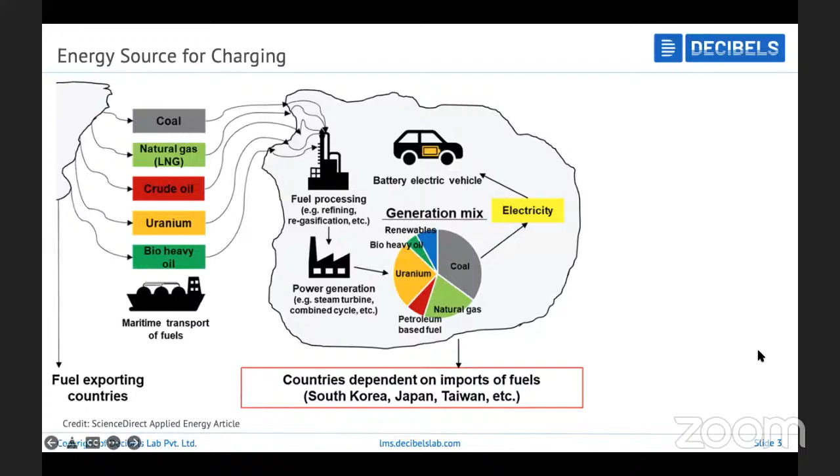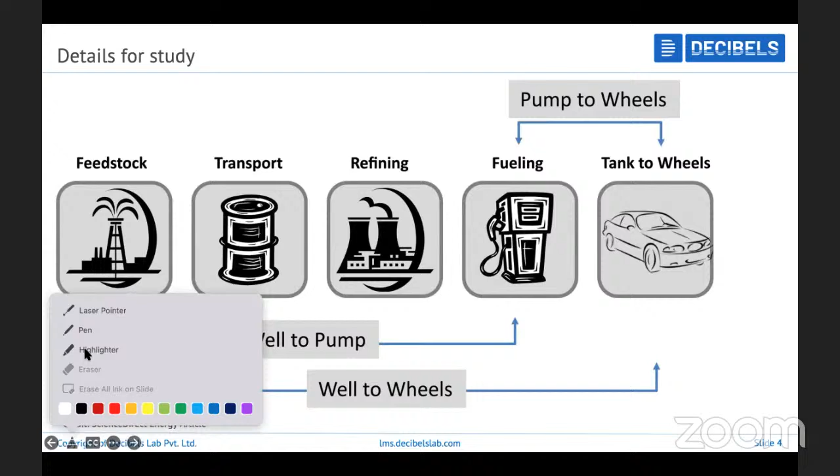The important thing we need to understand here is a topic called well-to-wheel. If you take this topic for discussion, there is well-to-pump, well-to-wheel, and pump-to-wheel. These are the three typical analyses that give you an idea of what kind of analysis should be done to justify that EVs are eco-friendly.

If you do the analysis between a fuel tank, or consider this to be a charging station, and an electric vehicle, then EVs are awesome. EVs are the most eco-friendly elements in the world.

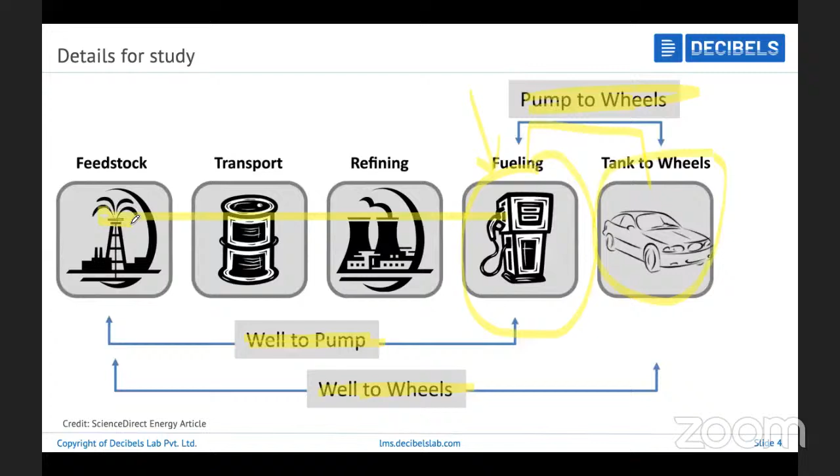But the problem also lies in this: it's not that you just don't make emissions in the city or at the tailpipe while driving, but you also make emissions across the whole bandwidth, from the production of electricity or extraction of materials. If it's diesel and gasoline, it comes from crude oil. If it's electricity, it comes from thermal power stations using coal, natural gases, or various other sources like nuclear. So you're making emissions across the whole line.

You're basically supposed to identify the source used to get the energy started. There is also data available that shows, if you actually drive a mid-sized car, something like a Swift, over about 12,000 miles or about 20,000 kilometers, you will produce this much carbon, CO2, this much NOx, this much PM.

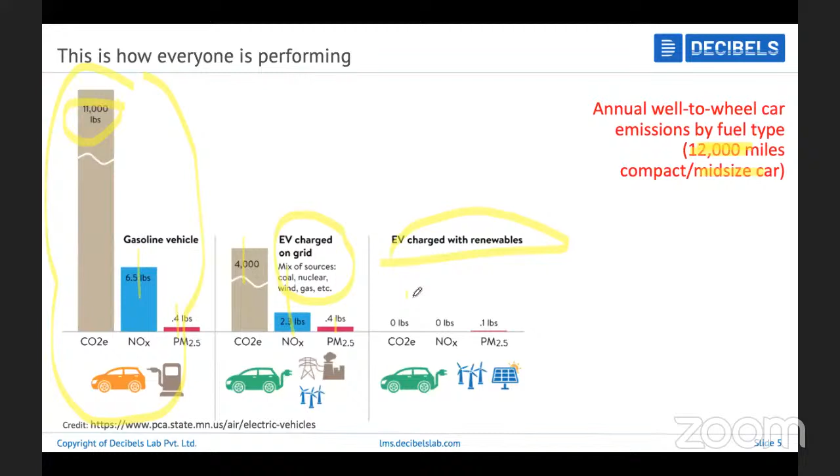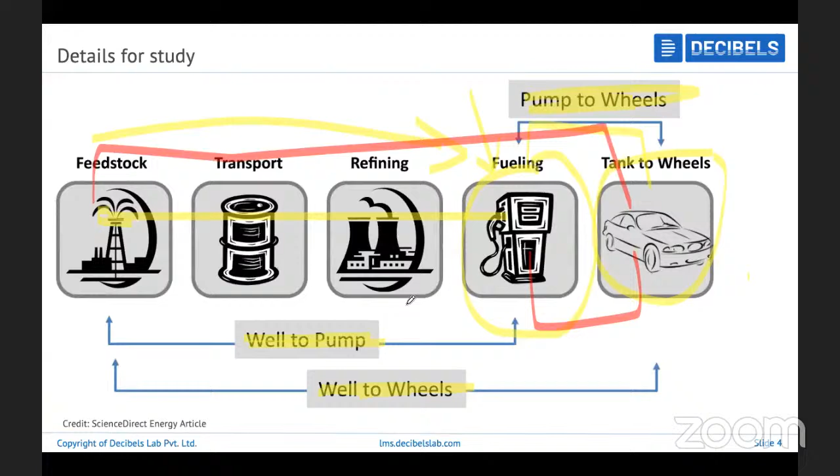But if you charge the EV by grid, you are expected to produce this much emissions. But if you do it with renewables, it says you don't make any emissions. Okay, this is not true. If I go back, this analysis is done between this point to here, not from here to here—it is between this to this. So with that way, it proves that EV is eco-friendly.

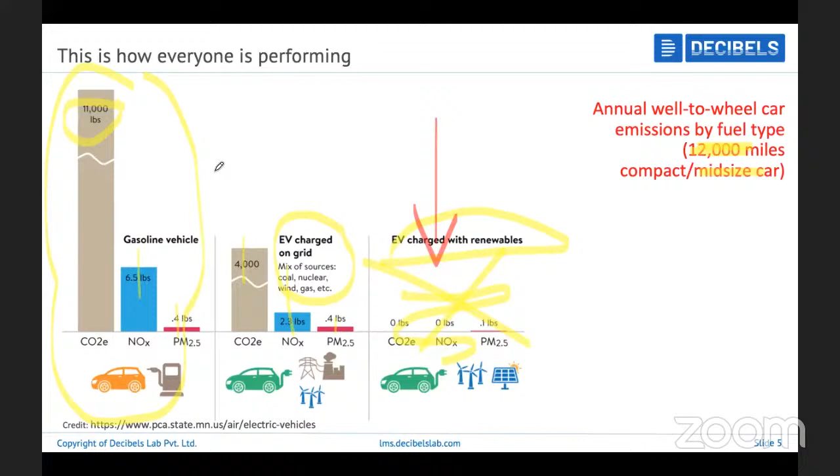So now we have to somehow prove this, that it is more eco-friendly with respect to our calculations. There's another slide where I wanted to highlight why we are focusing on the transportation segment.

Why are we focusing on the transportation segment to electrify? We can electrify industries, we can electrify different things. Already our houses are electrified because of all the electricity we use for applications. But in transportation, if you see the amount of energy produced and consumed, the transportation sector consumes the highest amount of energy. Because of that, if we electrify that sector, we will be able to reduce a lot of emissions. So that's the goal—why the world is focusing towards electrification of the automotive sector.

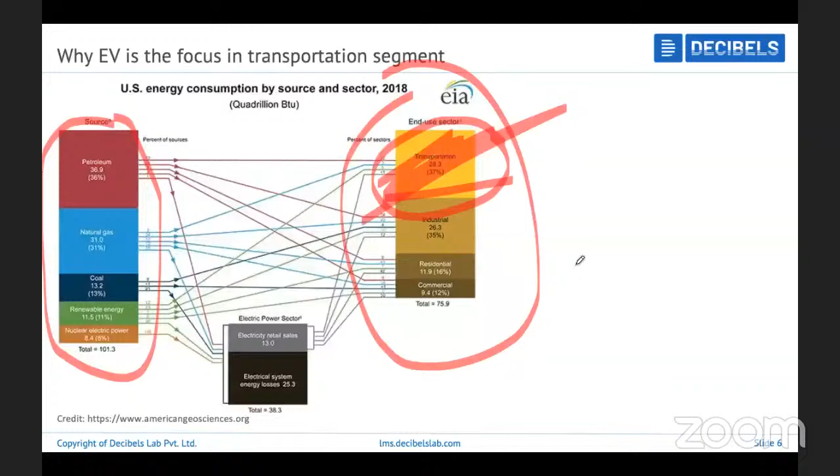I believe everybody can see my screen. So let's start one by one. If you can also do hand calculations along with me, that's good too. The first important thing from this side is...

Right, Bajan, yeah. Screen is not shared. Oh, is it? Okay.

So if you see here, let's take something like a Honda Activa and compare it to an Ather. They're almost like the same benchmark vehicles, meaning the Ather could perform similar to the Activa, so they are in a similar competitive environment.

If you see a comparison of range, let's consider it gives 50 kilometers per liter. In reality it may not be that, and the same way with the Ather it may be even less, but let's consider that they will give that much range for a single charge.

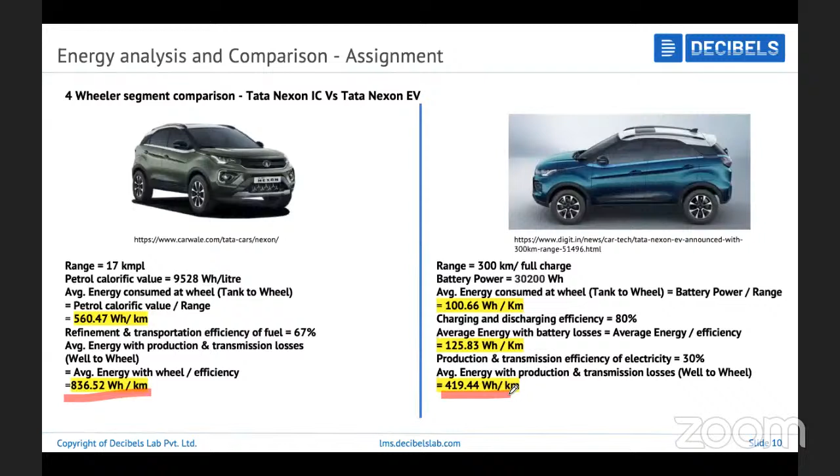Now let's start to calculate the emission. We know only the energy that is being consumed, but we also need to calculate the emission in terms of grams of CO2 and different parameters in place. So again, there is a math that I have done here.

CO2 content of coal is 660 grams of carbon per kilowatt hour, CO2 content of fuel is 530 grams of carbon per kilowatt hour. This data I got from research papers and PhDs, so it is believed to be correct, and I also compared with a lot of resources - that data is pretty accurate as well.

So if you want to produce about 1 kilowatt output, you would burn and create about 660 grams of carbon. If you want to make about 1 kilowatt of output, you need to create about 530 grams of carbon, by burning X amount of fuel or energy for other requirements in place.

Now let's go and substitute the data here, because what you have got here is 284.4 watt hour.

Let's consider this is 284 itself, or this is 133. Now, if you compare the data back here, so if you plug the value into this requirement—because if you make 1 kilowatt, then you make 660 grams, but it is not 1 kilowatt, right? The requirement is only 284. If you make 284, then you make about 150 grams of CO2 emissions.

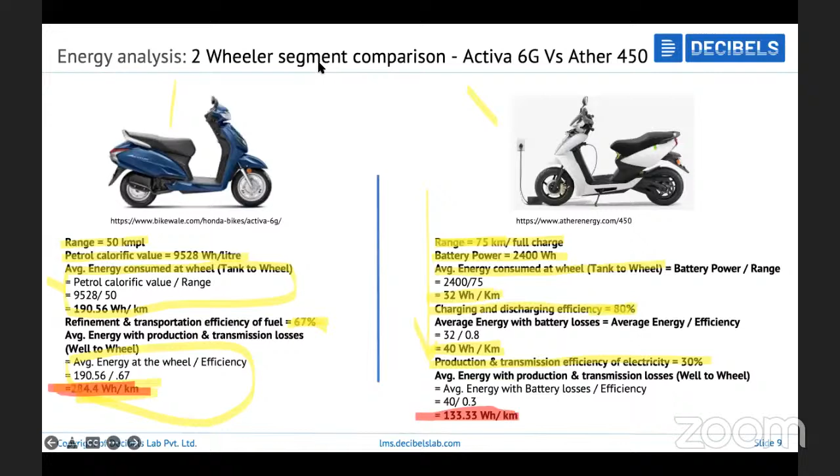How did we estimate the average consumption? I'm sorry—where average consumption, we have gone through the calculations. I believe it was pretty clear on how we arrived at these values.

Okay, so any questions from anyone? Right, so will we get a PPT? Sorry, we don't have an option to share it, but yeah, these videos are available on YouTube as well.

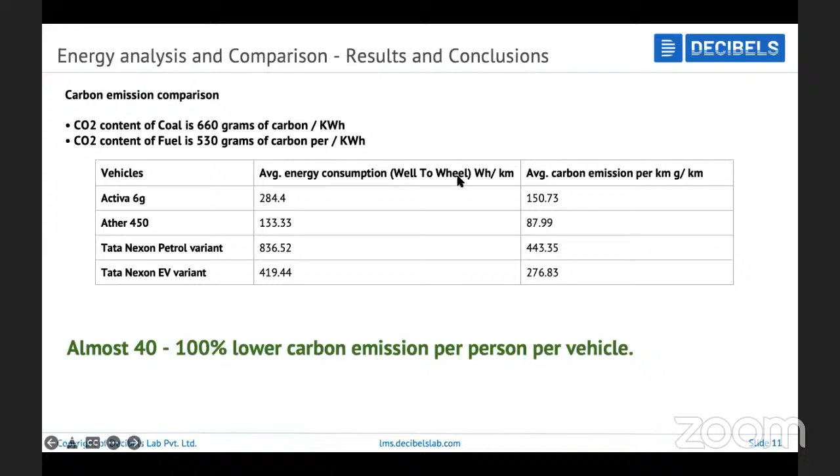Okay, so awesome. Then we are pretty clear at this stage on why EVs are advantageous compared to IC engine vehicles. So with this note, we can move ahead quickly. Again, any questions from anyone? We can still have a debate on that. Okay, so as of now, no questions from anyone. Then we can move ahead.

So just before I start ahead with the session, I just want to show you also our...

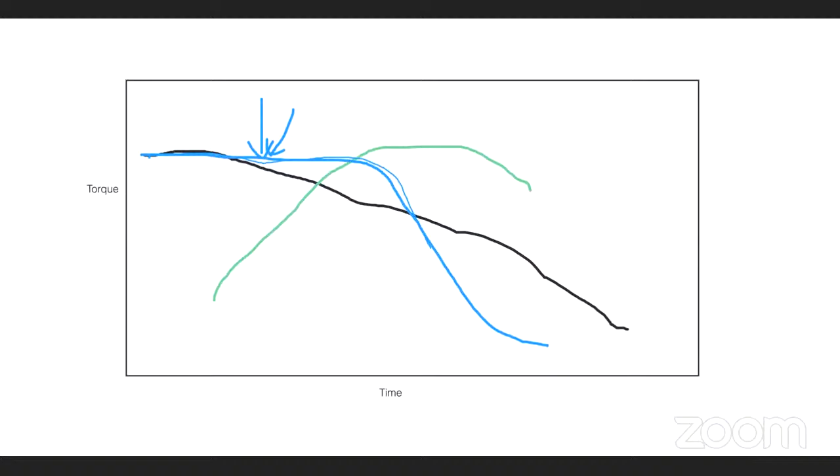So this is a typical torque characteristic of a motor. Now, can you connect the motor directly to the vehicle or wheel? Yes, because the torque is very high for the motor at the beginning and gradually comes down. If you compare that with the tractive requirement of the vehicle, it almost matches.

That's why in many electric vehicles, the motor is in the wheel itself—a hub motor. It means the motor has enough ability to drive the vehicle; the torque of the motor is very, very high, so it can drive the whole vehicle without a transmission. That's why you can skip transmission in electric vehicles, but you cannot skip it in petrol or diesel vehicles. Is it clear?

Because the torque output of the motor can match the torque output of the tractive demand of the vehicle, while the IC engine cannot. That's why you need transmission gear ratios for an IC engine.

But in some cases, you also need a transmission for the motor as well—though that transmission will not be big. In IC engine vehicles, you need a minimum of about 5-6 gear ratios in cars, and in bikes too, you use at least 5-speed gear ratios.

But in electric vehicles, you may just use 1 or maximum 2 gear ratios. It means you can make the transmission very simple and very small in size. Clear? Any questions?

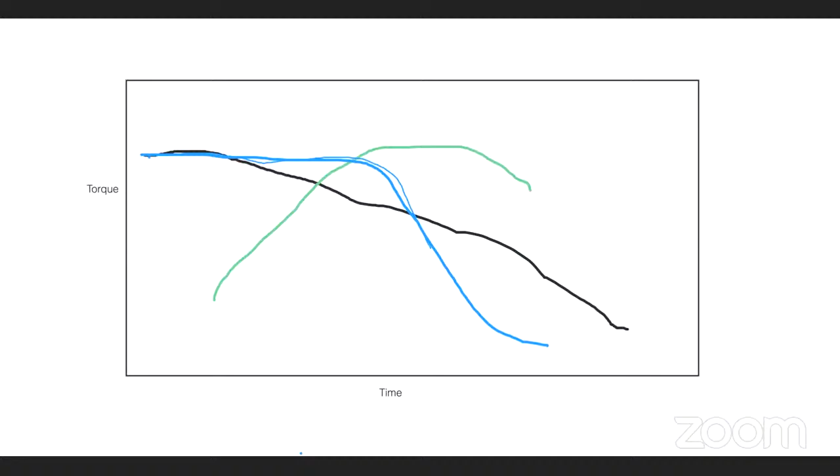That's the same way a lot of components will also combine and submerge together. I wish I could cover all the topics today, but there's a limitation of time, how much we can cover, right? We may have another 5 minutes to quickly discuss across everyone.

The motor controller takes care of controlling the motor's speed and torque. Apart from that, it also handles other parameters like mode control, regenerative control, and giving data to the display system to show the motor speed, so we can calculate motor speed, wheel speed, and so on. The motor controller takes care of a lot of operations, even diagnostics - if there's a failure, it has to inform that person. This way, the motor controller is an effective system that ensures the motor works efficiently in all possible regions.

The onboard charger is the one which is basically there to take care of charging the battery pack.

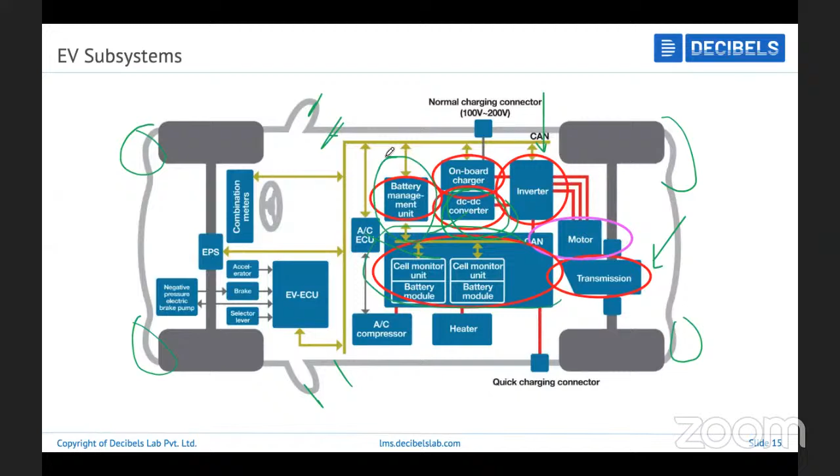Let me go through some images to give you some clarity. You have hub motors which sit inside a wheel. We also have mid-drive motors, also called non-hub motors. There's a lot of comparison between these two motors - when do we use it, why do we use it, and so on. Now if you see transmission here, this is a motor from the Nissan Leaf.

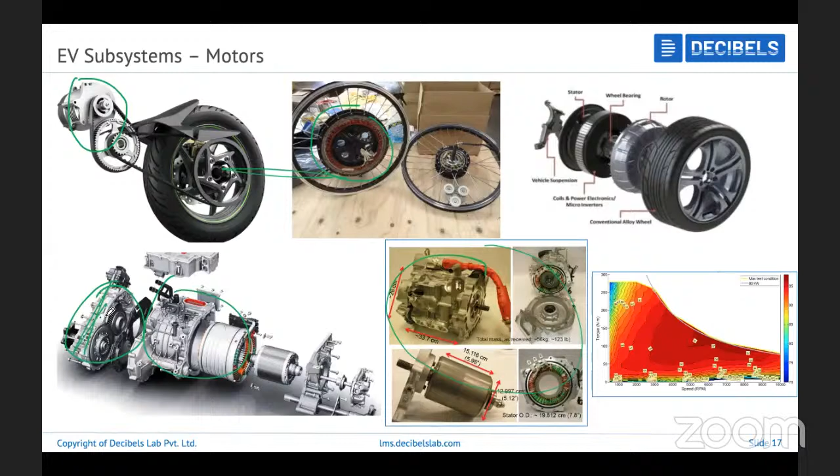In this section, the motor and transmission are so small. If you see in IC engines, the transmission is big, but here the transmission is quite small. It's because it basically just has a 2-speed or 1-speed, basic reductions.

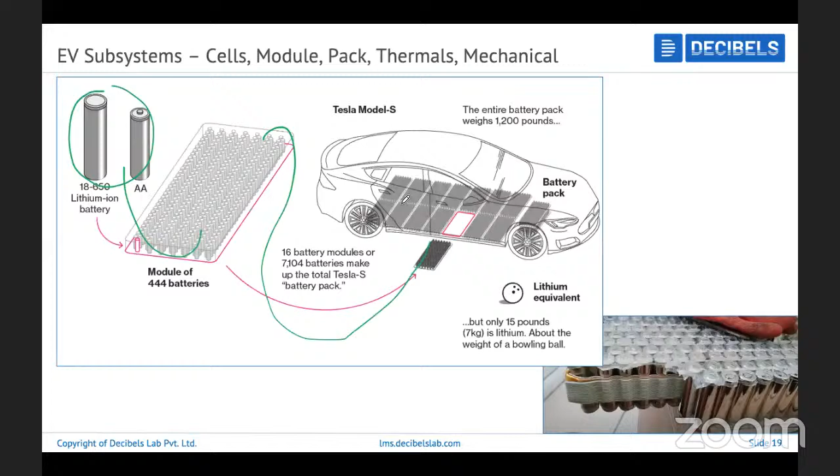Motor controllers, then the battery packs - I said it's a combination of cells to form a module, combination of modules to form a battery pack. Again, there's a lot of content here. As a limitation, I'm not able to cover everything, but we can suggest where you can learn as well.

The next thing is cell safety. The cells are quite dangerous - you have seen some circumstances like this. It's not that you can avoid it 100%; there's no guarantee it will never happen. It may happen as well, but it's only about how much we can ensure to reduce the occurrence of such scenarios. You can reduce the occurrence by keeping the battery in a safer region. That is why we use a battery management system, which is basically a way to ensure safety for the battery pack.

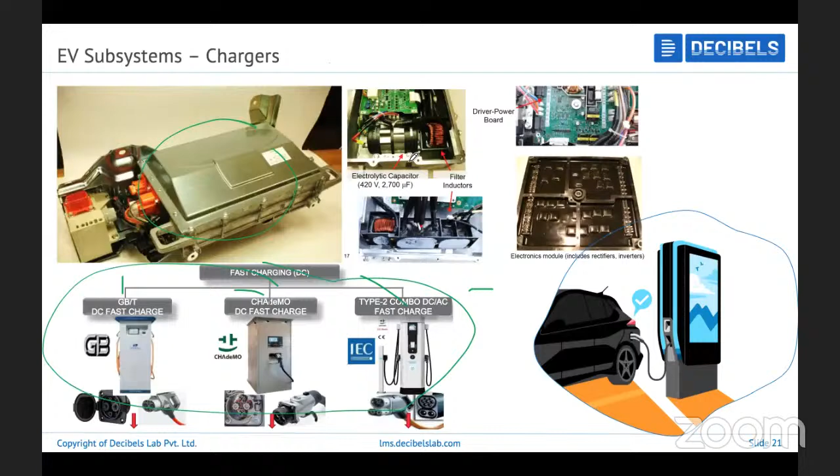So there's also other loads such as HVAC load and DC-DC converter load. Interestingly, if you've ridden in a car, imagine you park it, turn off the engine, then try to press the brake. The brake becomes harder, right? Why? Because typically all brakes are assisted by engine vacuum. Just turn on the engine and it becomes proper again, you can easily press the brake. That's because engine vacuum is used to assist braking. The same way in an electric vehicle, there is no engine, so you can't get the vacuum. You need to use a different pump for the braking system.

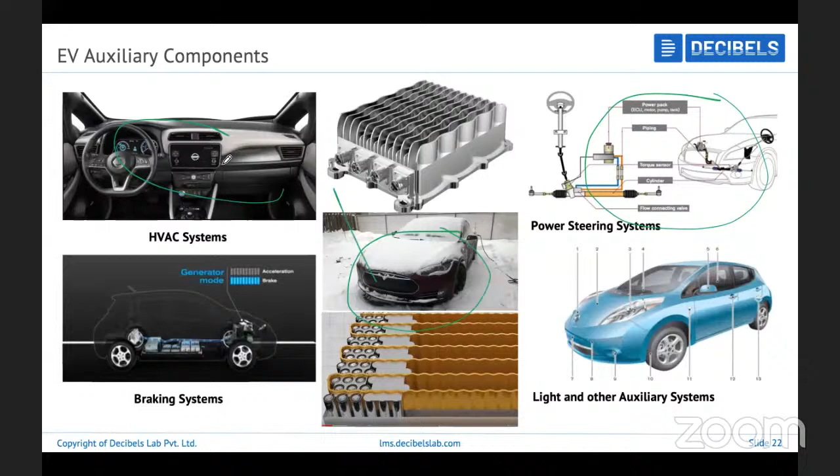Again, in heating and cooling, if you know how heating was done in IC engines, the heat is there because the engine is running. Heat is produced and simply dumped into the environment, so you take that heat into the cabin through a heat exchanger, exchanging heat between the engine and cabin. But in electric vehicles, you may not have that source available. Even though there is battery heat and motor heat, bringing that heat in becomes an interesting factor. So we need a separate heating system and a separate cooling system. There's a lot of difference between IC engine and electric vehicle components.

I just gave you a very surface-level overview of what these components and systems are. If you have any questions, the floor is open for Q&A. You can also unmute and ask.

Which cell is best for racing applications? Nowadays even cylindrical cells have higher discharge rates as well. It depends on whether you can get the cell. Today it's not just that you want a pouch cell or a cylindrical cell, you should have a supplier to send you that cell so you can buy it. So it's not just that you can have the cells available. Prismatic is out of the case, but you can use between cylindrical and pouch, just check which one is available.

How to control the current increase in winding when the load increases? You could have a motor controller - that is a functionality of a motor controller. It lets more current through depending upon the load on the motor.